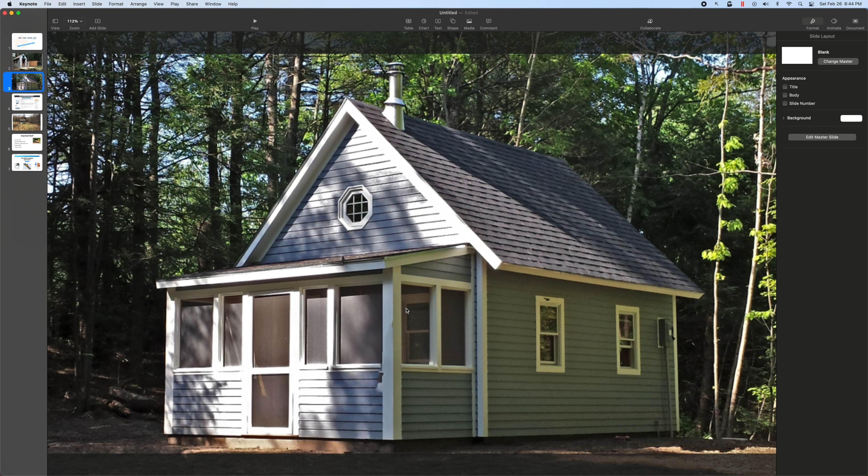The criteria for this tiny house, first of all, is I'm going to use only milled lumber. So I bought one of these woodland mills, sawmills. You can sawmill a 26-inch pine log. I happen to have a bunch of those on my property where I'm currently living, and so I'm going to turn those into boards.

I'm going to use those boards to build this new tiny house. I'm going to basically build it locally here at my 250 square foot tiny house location, and it's going to be bolted together, screwed together, and then when it's all done, I'm going to unbolt it and strip it down to the individual boards, put it on a trailer, bring it up to northern New Hampshire, and assemble it in a single weekend on site.

The foundation for it is going to have to be very simple because the road that goes there is actually a snowmobile trail in the wintertime, but in summertime it's this very narrow dirt road that's barely maintained. So cement trucks aren't coming out there. It's going to have to be a very, very simple foundation, probably made out of bags of concrete.

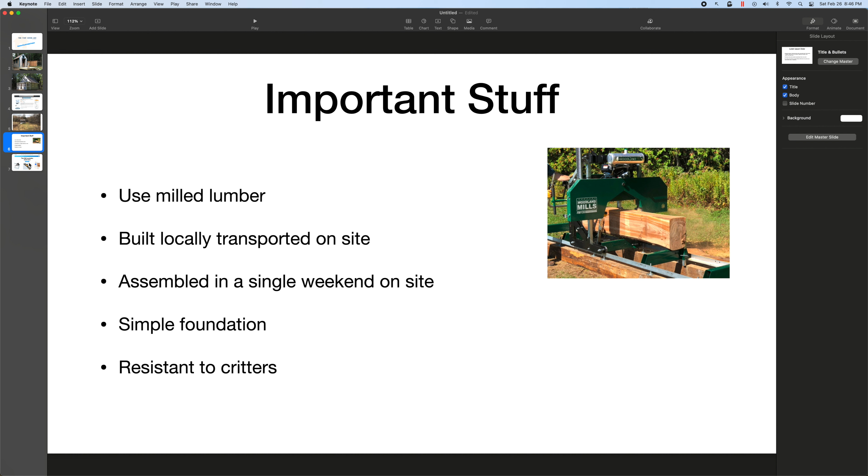So what we're going to do is today I'm just going to show you the foundation of this new tiny house that I'm designing, and the tool that I'm using to design it is a program called Shapr3D.

I have no affiliation with this company. I've started using this a couple years ago on the iPad. It's a fantastic 3D modeling program, very intuitive, very simple to use. I've used Fusion 360 and a couple other 3D modeling programs, and this one is way easier to get started on. I think my first time I used it, I was designing walls and house parts in 20 minutes. A few videos here and there got me some of the finer details, but it's a really, really easy to use program. So let me show it to you.

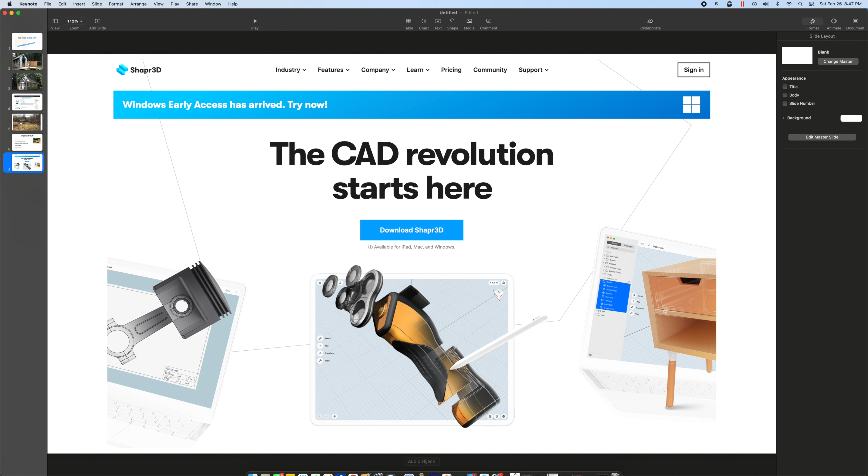This is it right here. And you can see over here on the left, I have all these folders with all the house parts in them. The one that we're looking at right now is the footings.

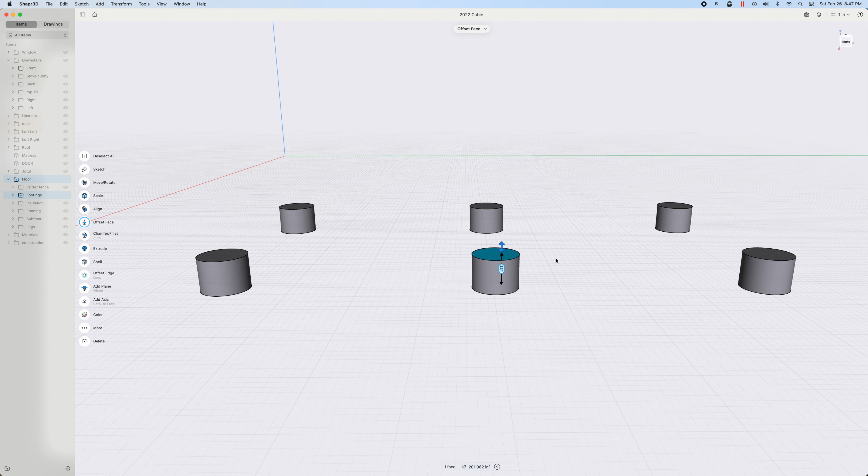So if I rotate this up, you see I have footings here. One of the challenges that you have when you're building a tiny house, starting with the footings - these are all nice and uniform, exactly 16 inches. I don't know how tall they are, but I think they're like 12 inches. Actually, I can tell you right there - yeah, 12 inches. So the problem is that the land that you're on generally isn't level.

And so these are going to be in the ground, and you should attempt to generally - cardboard tubes go in the ground, and you pour concrete in them.

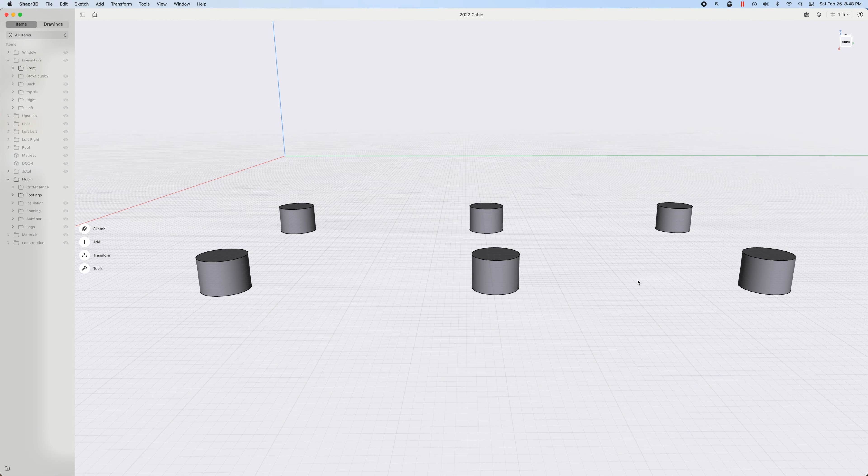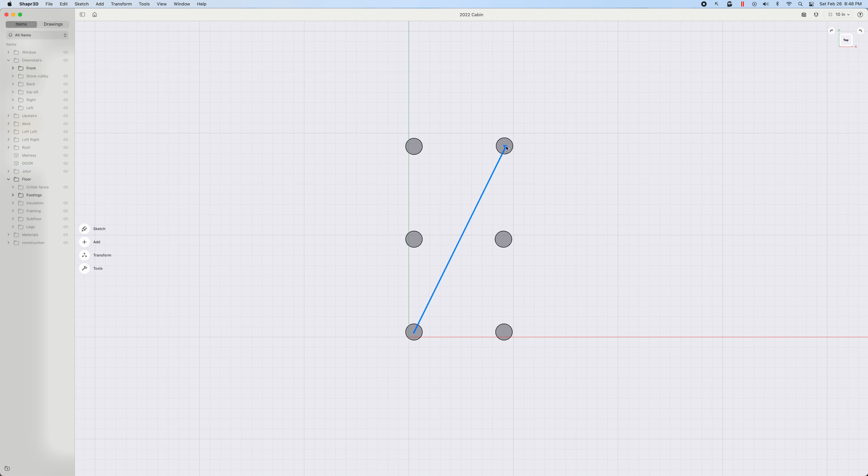It's very, very challenging to get these tubes level across the top and to be square at the same time. When I say square, let me show you this view with my annotation tool. So when I say square, I mean you need to have this distance the same as this distance. Getting these in exactly the right spot is kind of challenging.

You've got to get these in that spot, and you have to get them up and down at the same time.

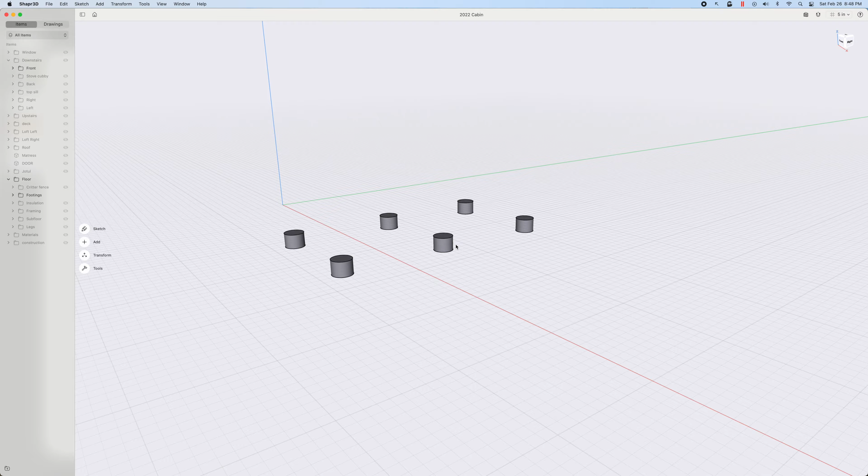It's pretty challenging, so this design is going to lend itself to dealing with that problem pretty easily. I'm going to put these in the ground and get them as level as I possibly can within an inch or two. Even if it was 10 inches, it really wouldn't matter because I'm going to use legs.

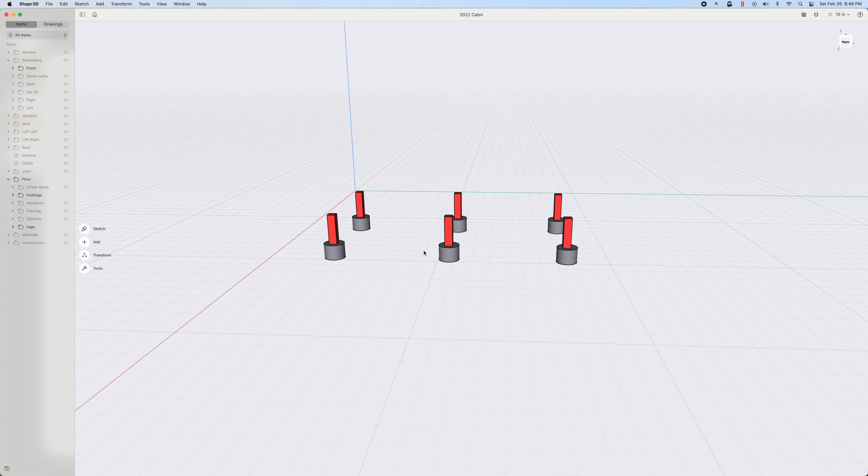So these 6x6 legs, worst case, if this footing was up in the air by 6 inches, I'd just cut this leg 6 inches shorter. And if this one was down 2 inches, I'd cut it 2 inches longer. Basically, these 6 legs will be trimmed to meet the topography of the land or any inaccuracies in installing these footings. The most important part, though, is really to make sure that this distance ends up being correct.

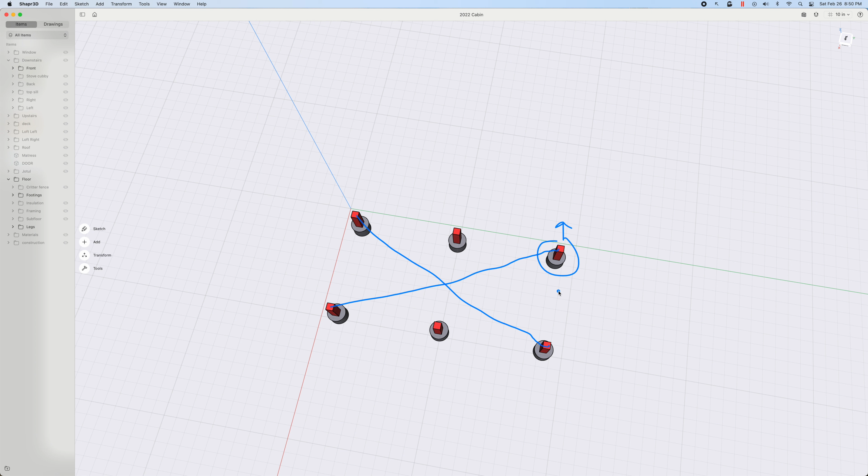It's far more important to have squareness in a tiny house than it is to have level. You can always put shims and level something up. It's very difficult if this pole was over here somewhere - it'd be very difficult to make the house square. You just can't do it in some instances. Even a small amount, like a quarter of an inch, makes a difference as you start building the house. So it's very important that this gets to be square.

So those are the legs. We're going to have footings in the ground, and this is the legs for the house. On top of that, I'm going to show you the framing. So there's the framing, nothing too spectacular here - these are 6x6 posts. Let me flip this up for you.

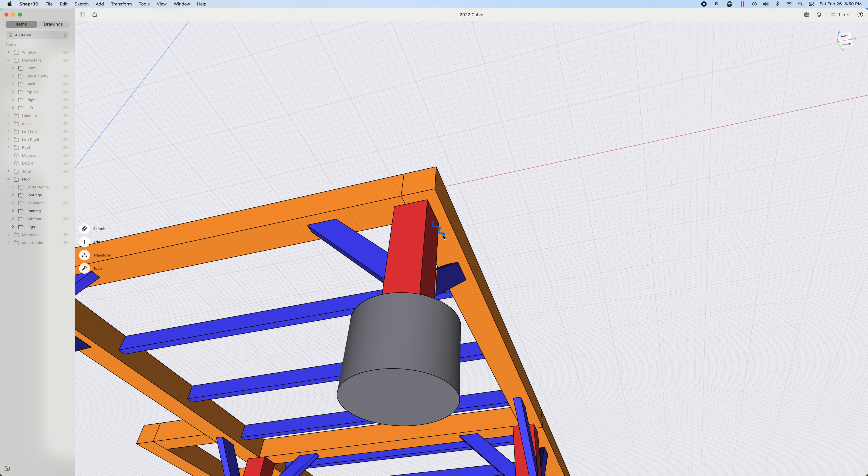I'm going to basically offset this 2 inches on either side, which will allow me to put a skirt that's flush with the side. So in this area right here, there's going to be a skirt that will keep some of the critters from getting in. They're probably still going to get in - mice and things will get underneath whatever you put. But the idea is that I'll put some foam insulation and some kind of galvalume or something on the front of this and all the sides just to keep things from getting underneath the cabin and living in there.

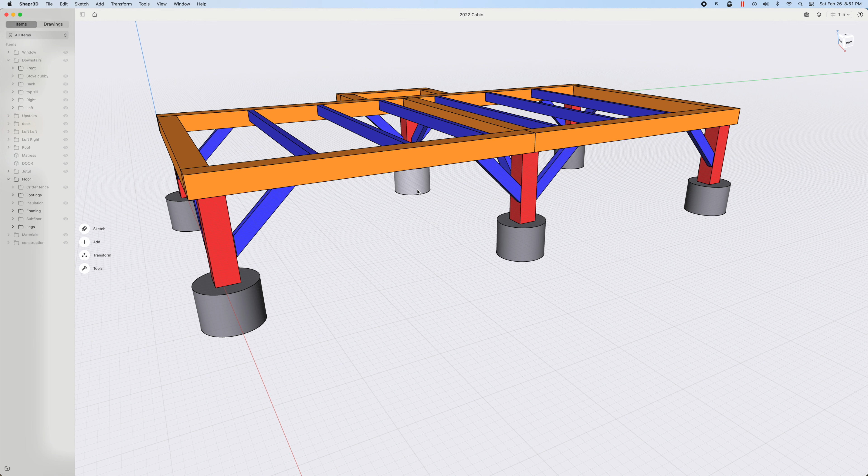Skunks, it actually is a bigger issue. So that is that, and each of these you'll see are sort of braced.

One of the concerns that I have is if you look at this whole face up here, this is a huge sail. When the house is in here, the wind is going to come in and blow, which is actually going to apply forces up - it's going to want to tilt, it's going to want to tip the house over, since it's such a big sail.

So keeping these things anchored in the ground is important - keeping this anchored so that you have attachment points that are really secure, so your house doesn't tip over where it's so small and light. It's a very important thing to do.

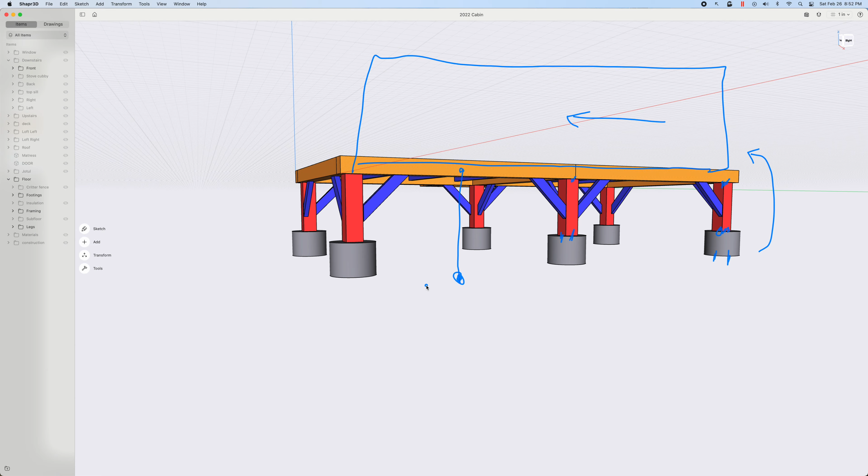If I get really concerned about it, like if I'm on ledge or something and I can't get good solid footings, I might actually put cables or chains attached down to ground spikes or ground anchors that you can put in. I might consider that, but I think I'll be able to do it with just footings. We'll see, but that's really more of a site issue.

I guess today we're just talking about the construction. So this is a little bit, I don't know if it's unconventional exactly, but it's what I'm doing.

These openings right here, I'm making exactly 24 inches. Typically these are 24 inches since the studs are 24 inches on center, and I have to fill this up with rigid foam insulation. So I'm making them 2 feet by a little bit less than 8 feet to make it easier to insulate. Since I'll be cutting these boards, they're 2 inches by 4 inches, full 2x4s, not like the ones you buy at Home Depot. They're actually 1.5 by 3.5 inches, so much stronger. I'm leaving my openings 24 inches wide in many places in this building just to make the insulating easier.

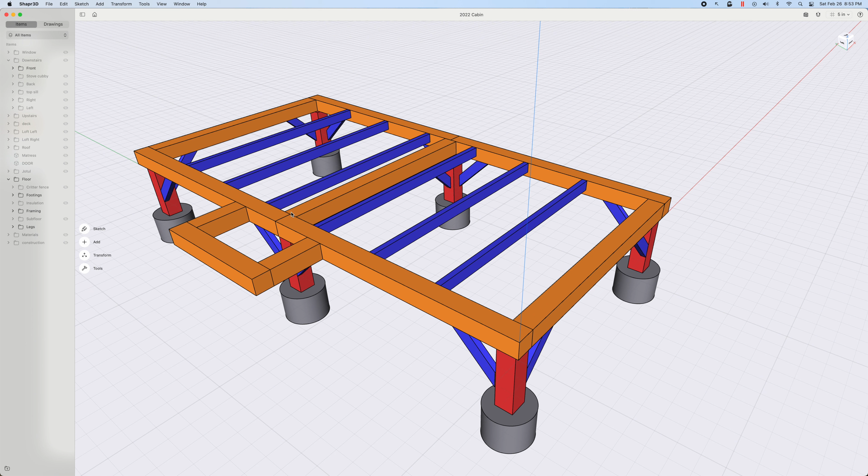All right, so let's get rid of that. And back here, what is this stupid thing back here? Well, let me show you.

I'll turn on the wood stove. So this is the wood stove, it's going to be a wood stove cubby. The idea is that if the wood stove was out here in the middle, it would take up a huge amount of floor space with the clearances. So tucking it back into its own little cubby, it only sticks out about 9 inches. Yes, you have to have a little hearth, but it's not going to suck up quite so much space inside the house. So that's basically a wood stove cubby, this little thing that juts out.

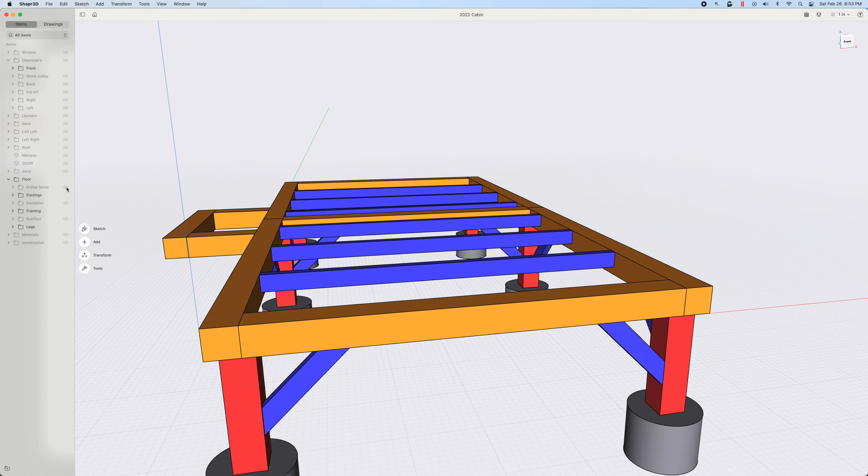We'll turn that off. Let's take a look at the next step, which is what I call critter fencing. What animals will do if they get under your cabin is eat into the foam insulation that's going in here. So I'll be installing this, it's not going to look exactly like what I drew, but you saw when I turned the layer on it slowed down the system because there are so many little squares I had to draw. This is basically going to be like chicken fence or quarter-inch hardware cloth, metal fencing going in here that will prevent critters from eating into the insulation and building nests in the insulation of the house.

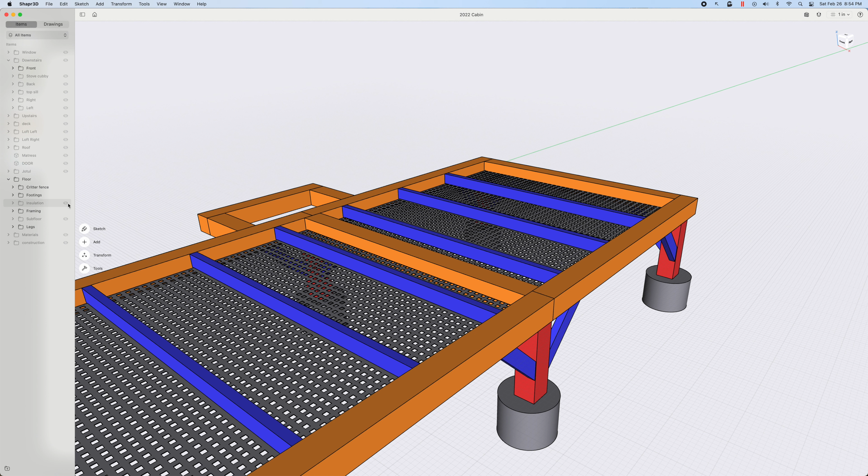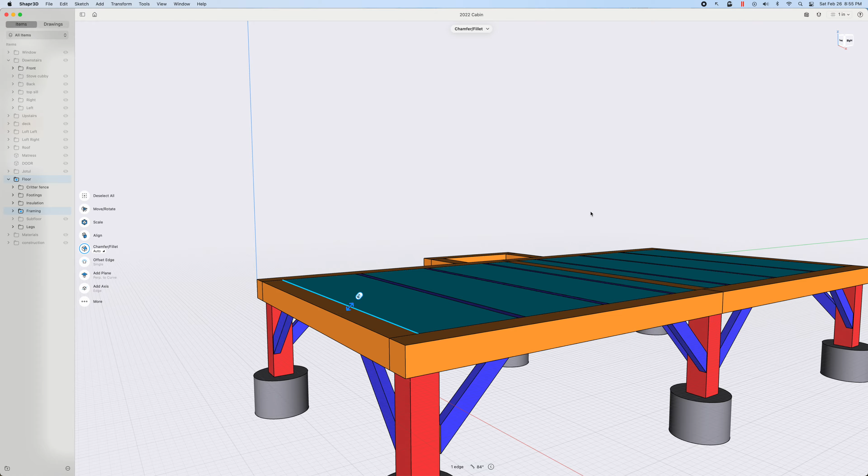And then we're going to have insulation. This is the rigid foam insulation, it's going to fill up. Again, these are 2 foot by, let's see if it tells me, 84 inches, a little bit less than 8 feet. So this is 8 feet by 16 feet, and this is a foot less. My disc is almost full, I hate when that happens. Okay, and you can see from underneath, there's our critter fencing.

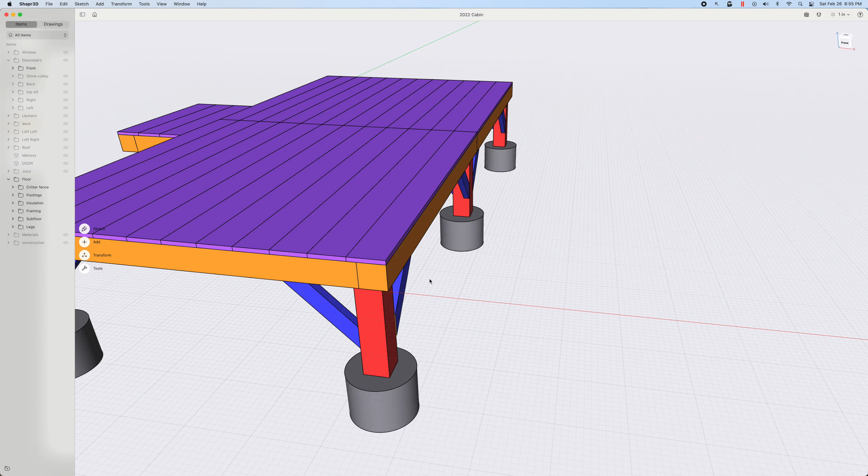Then I'll turn on the last thing I'll show you, the subfloor. This is what the subfloor is going to look like, just 1-inch planks. Since I'm milling these out of my own trees, I'm showing about 8 inches wide, but in reality these will be random widths depending on how I try to get as much wood out of the tree as possible. It's rough cut, so sometimes the edges have a little bark on them, but I put the good face up. These will all be kind of random lengths across here, and I might put them at a 45-degree angle, like how they used to build old school houses. So anyway, that's the base.

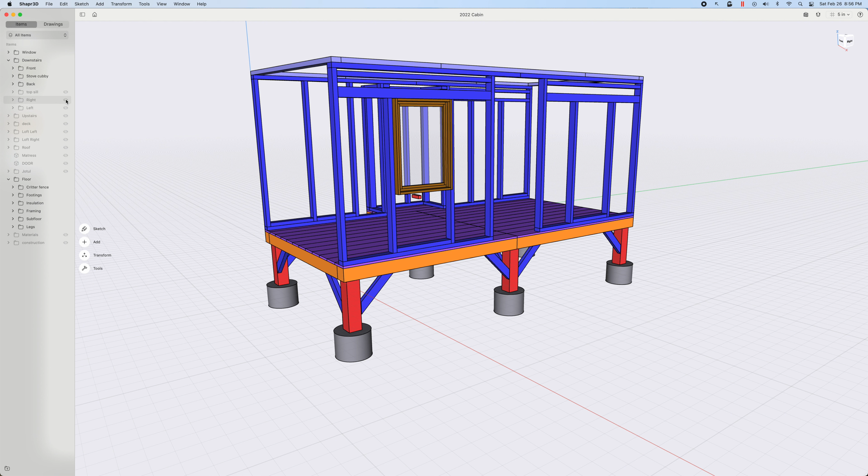I guess what I'll do, just as a little teaser for next time, let me turn on some other layers so you can get a sense of windows, framing, top sill. Let's see. Oh, there we go, come on. So this is what it's going to look like in the end.

In future videos, I'm going to go over in more detail the final product. I haven't quite finished some of these things yet, so I'll show you as I finish it.